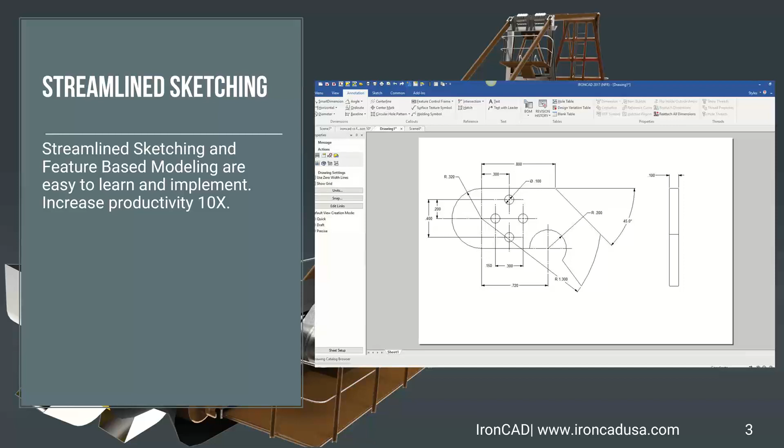So let's get right into the product. For those of you who have watched my webinars before, I'm going to start really simple and we'll get more and more complex. The easiest way for me to get into a sketch, of course, is I could go to the sketch toolbar, but I'm kind of lazy. I like to do things without hunting and pecking for things. So I like to use this extrude wizard, because that's the first thing I'm going to use to create a very, very simple freehand sketch for you all.

I'm just going to say okay, this is going to be a standalone solid. That's all I want. Just want that, and it immediately puts me into sketch mode, which allows me to show you something. I'm going to make my first part, and it's going to be a very simple little part. We're in part one right now. All I'm going to do is just introduce you to the tools.

So here are our sketching tools: polyline, 2-point line, rectangle, all sorts of different things, and we'll look at that. I'm just going to show you now, from the beginning. I'm going to start at 0,0 and just drag a line. Now you're seeing, as I'm sketching, this smart snap and information being given to me, whichever way I go, of course I get to see this information. And when I snap, that line is finished.

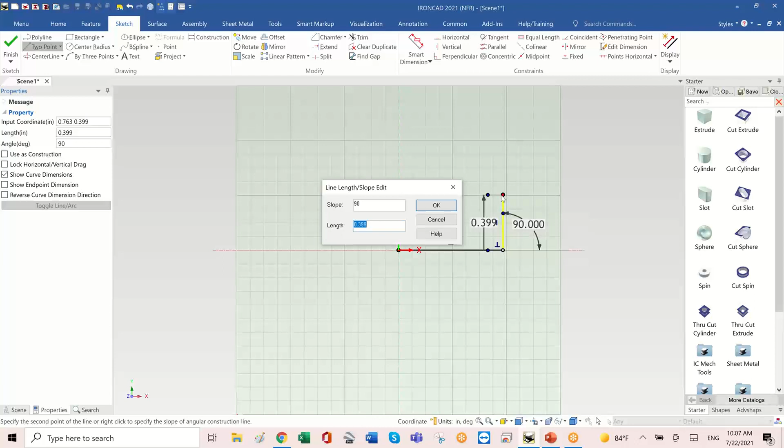If I'm still in this mode and I wanted to do something very simple, come off here and say okay, you know what, I want that to be exactly half an inch. I use the right mouse button instead of the left. So now I know it's exactly half. I'll do another little sketch to here, and I'll do another one. I'm just doing some really simple work, as you can see, and I'm not constraining anything. I'm just putting this all together.

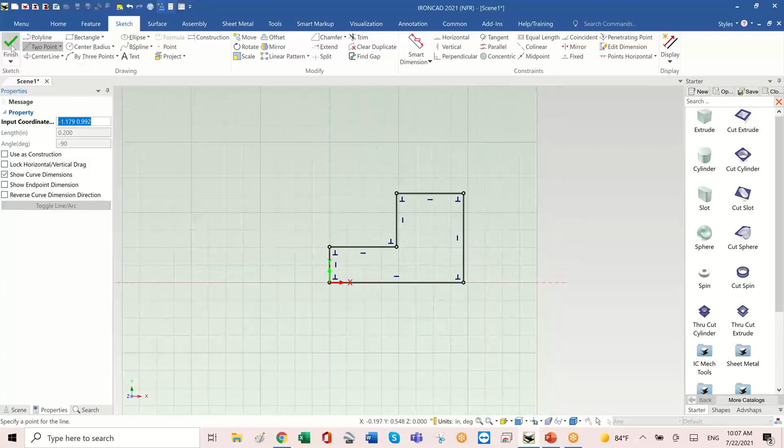As I'm working, that's my little sketch, and I'm not going to put any constraints in. As far as I'm concerned, I'm done with that, and I created my first simple shape. So that's just an example of concept sketching where I used a polyline to create something. But notice I didn't need to do any constraints whatsoever.

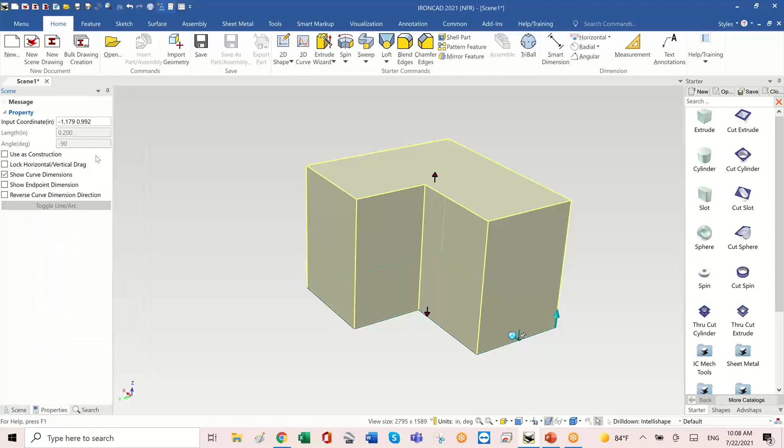I still have the ability to come in here and say, oh, I want to make a change to this. Even in the 3D world, I can come out and make a change. At any point, I can also go directly back into the sketch, the original sketch that was here, and if I wish to make changes, that's something I can do right now. I have the ability at any point to go back and make the changes, and that gets reflected in the 3D model.

So this is not the part we're going to be making, I'm just introducing you to the concept of sketching. The first part we're actually going to make comes directly from the website, and happens to be Joe Brouwer's website, and it's very informative. This is the part that we're going to be making. The reason I'm showing this to you all is because it gives us a great way. I want to introduce you to Tech-Net. These lessons, modeling techniques, are all online.

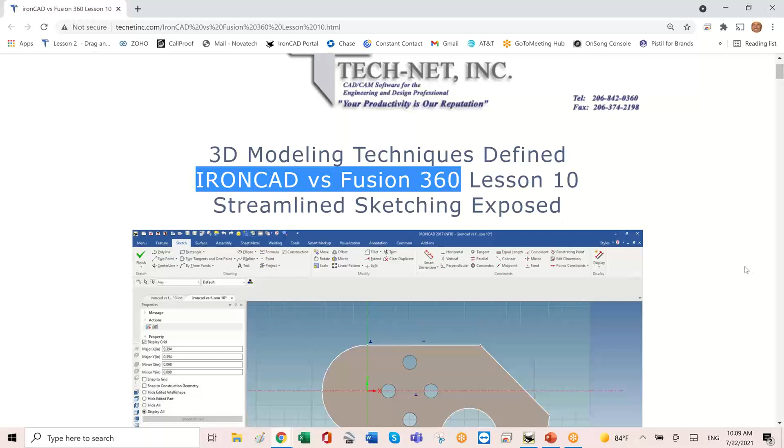What makes these kind of interesting is that there's a direct comparison with competitive products, so you can see how we work. I like to use what Joe's done because it gives me a great example. Joe comes from the drafting world, so everything he does is very topical and pretty easy to understand and see how he works.

So I'm going to be following that, and I'll show you how we make this sketch directly. I'm going to drop this onto a screen above me so it's not in your way. The very first thing, this drawing I have here, I want you all to be able to see because it helps us understand what you're looking at.

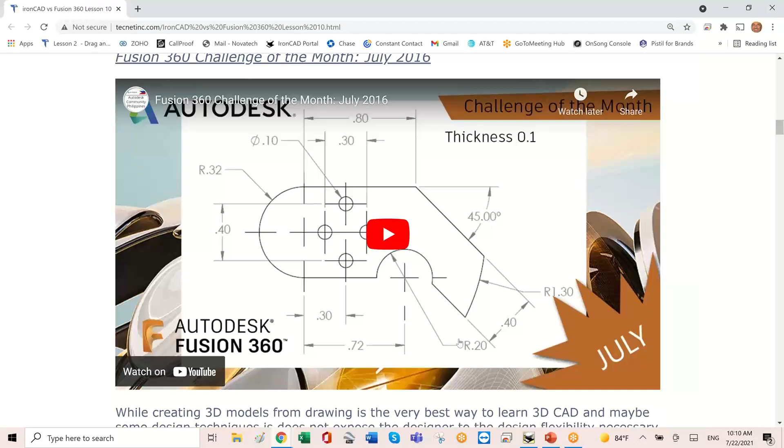The other thing that Joe does, which I think is fantastic, is you can see how this is done in another system. I know this particular one took about 10 or 11 minutes. For us, it's about a minute worth of work. So I'm just going to show you this part real quick, and then we'll go from there.

Let's start off with a simple extrude. With this extrude, I just want this one to be, let me take a look at my drawing, I don't think it's that thick. Hang on, Joe, I'm just looking here. It's 0.1 thick, so that's what I'm going to make, 0.1 inches. This part is in inches. I'm just going to finish that.

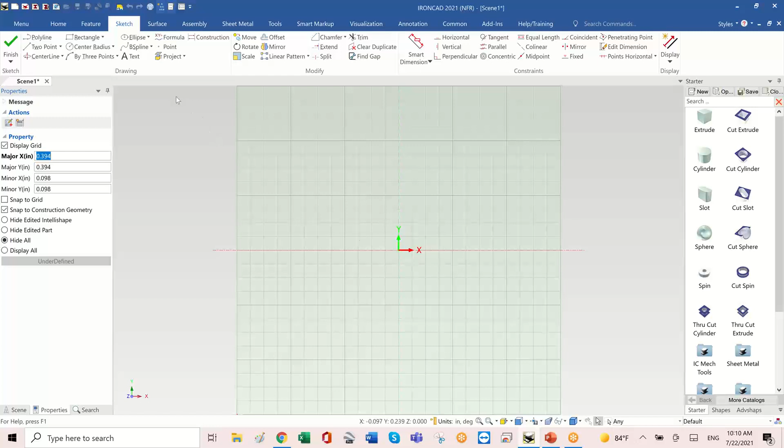So now we're directly in the sketch, and the first thing I know I need to do is create a 0.32 radius circle. I'm coming up here, center and radius, simply left click. And here's kind of a neat trick: if I come out and say 0.3 to get it approximately, and right click to place it, it automatically brings up this box so I can put in the correct value.

So now I know, and to keep everybody watching up to date, I'm going to be showing you this sketch. Now I need to create a line that comes directly off here. It's 0.8 and it's a horizontal line, 0.8 off that. So back into IronCAD, what do I do? I go and find a line that is tangent.

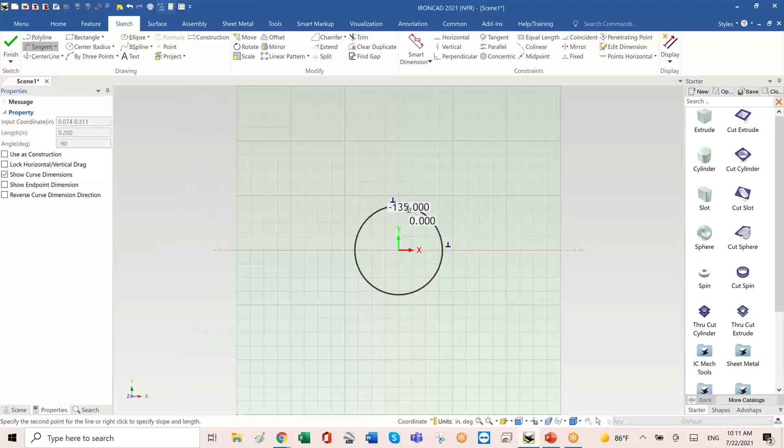This is kind of neat too. I just touch the circle, so it automatically connects. Notice how it's maintaining that tangency as I move around. Now I'm going to approximately get into position, and right click again. Why? I guessed the slope correctly with the smart snap. And the length of this, from the drawing, is 0.8.

So now let's look at that drawing below here. There's the 0.8. Let me show you how to fix that. 0.8, and then there's another sloped line coming off it. Let's take a look. You show me something, oh, 0.88. Well, that's not what I want.

Double click. Joe was telling me this morning, Bobby, the neat thing is when we make mistakes, that's where it shows how easy it is to actually fix it. So we've done that, which is kind of neat.

Now I'm going to come off the next one. So what's our next part? Right here, we're going to come down 45 degrees, as you can see. I don't really know the length of this because it's bounded by a circle that's 1.3. But let's just jump right in and do a 2-point line.

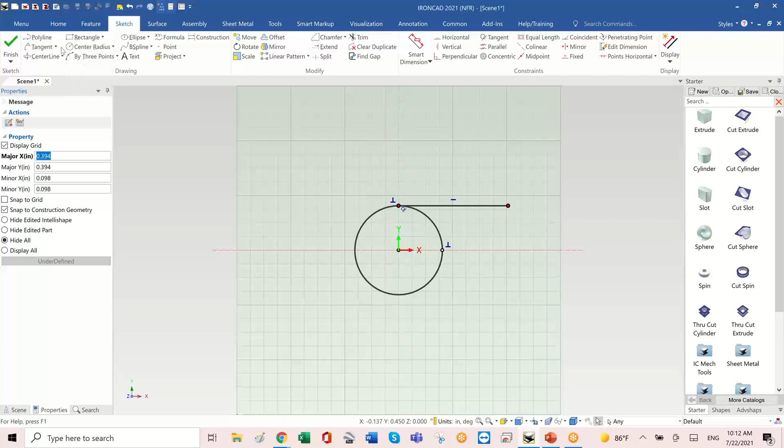Check this out. Grab it here with the right mouse button, and now I'm going to come off and release with the right mouse button again. What's the slope? It's exactly 45. I don't know how long it is, don't really care, but now I'm guaranteed to know that line is at 45.

And when I put the next center radius circle in, just to keep you up to date on the print here too: this big circle, 1.3, located at the center of the other one, that's what we use to trim this thing off. So pretty easy.

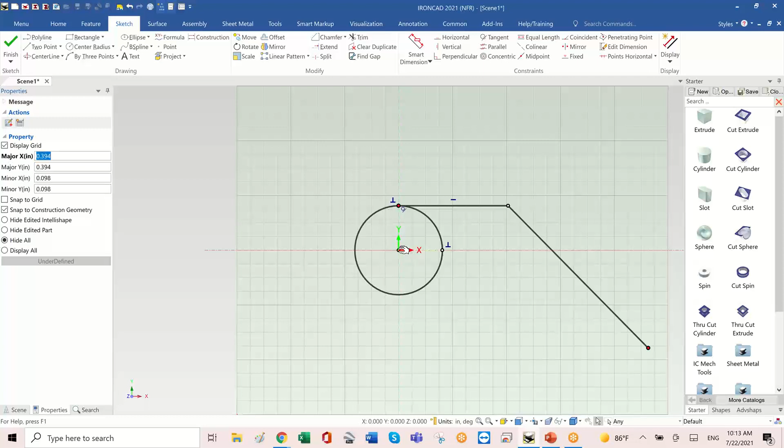Come in, find center radius, pick the center radius again. If we pick that selection, it helps. How big is it? Okay, 1.3, 1.3, enter. And so, well, that's pretty cool.

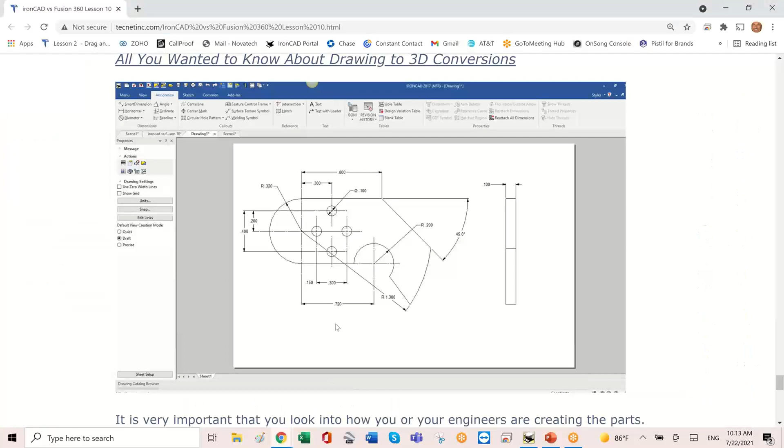And I also know, has anyone seen me do any constraining yet? Not once, and I don't intend to do any constraining on this. You know what? I can see the part. So what I'm going to do is take this part right now and move it onto a different screen so I don't need to keep jumping back and forth.

All right, here's the part. I know I've got a parallel line to that, which is, I believe, 0.8 over here. So give me a 0.8 line.

Did I get that? Where'd you go, little guy? Offset this line - there it is. Now I can trim exactly what I need to.

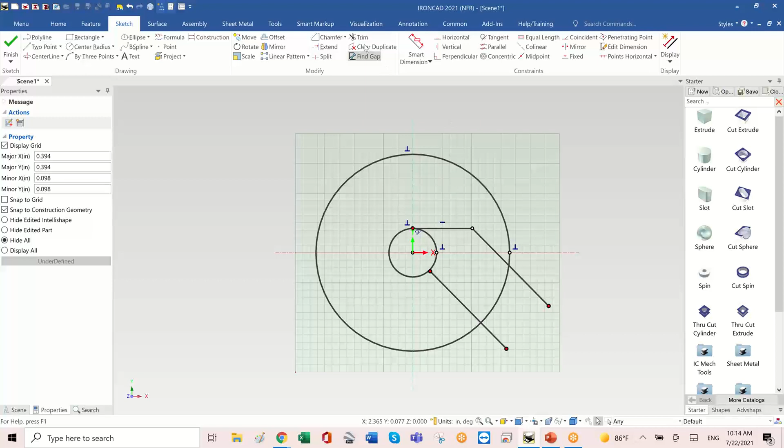Oh, by the way, I don't want that. It gave me a constraint. I just said no, I'm not going to work with constraints today, but we can if we want. Trim this away - I don't need this part, and I don't need this.

Look what's happening, I'm coming through. It's automatically giving me, as I start to build this part - it's kind of neat, it's building it as we go along. So, not quite done yet.

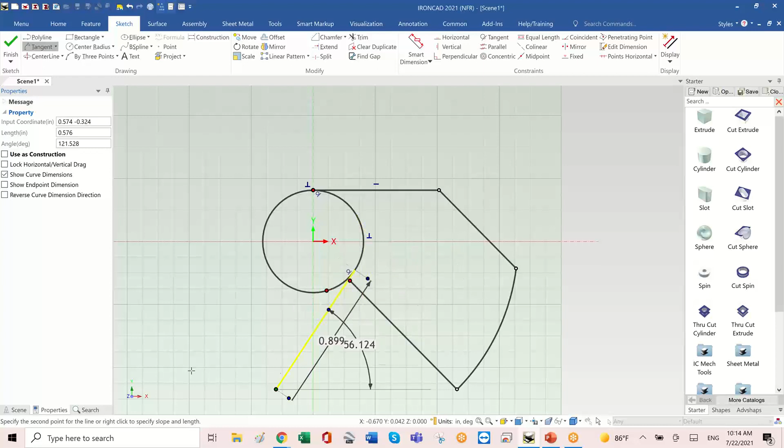Give me another - not a 2-point, a tangent line that comes directly off here, and it's 0.72 long. So again, touch the circle - hey, where'd you go? Wrong side. Touch the circle again here, and I want this line to go exactly how far?

Well, I know that it's got to be 0.72. So, 0.72 - all right, that's how long that line is. And why did I do that? Because that's the location of a 0.2 inch circle.

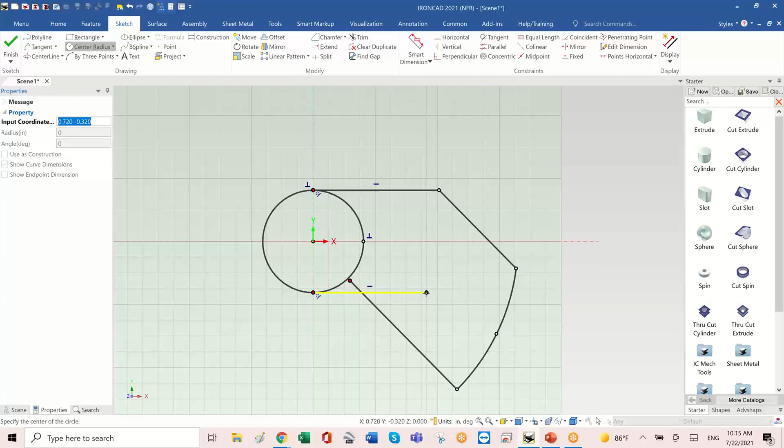Oh, 0.4 - thank you, appreciate that, Joe. This is 0.2. Thank you, and this distance - hang on, you are...

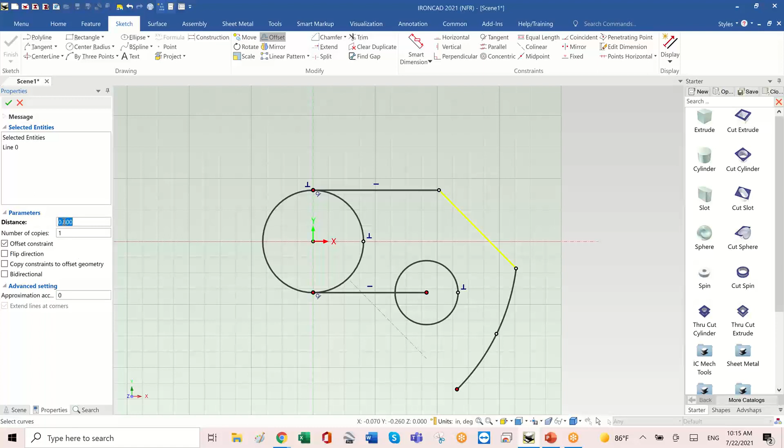I don't actually like that. By the way, I didn't do that correctly. What do I care? It's half of that. I'm going to, as I go ahead, that's where it should be.

And by the way, how easy is it to extend or work with this geometry? Watch this - I just grab this line and extend it there. I'm just picking and placing.

For those of you watching this, I've actually finished what I need to do now. So I just trim away the geometry that's not necessary anymore. Don't need this, I don't need this, don't need that. I don't care - don't need this one, and I don't need that either. And there, looks like I got a pretty good shape.

At this moment in time, I've done what I need to, and I'm going to say, go ahead and finish this. And there is the first part that I created. So there, I don't go any further. This is exactly the part I was looking for - this is what I needed to do, 0.1 inch.

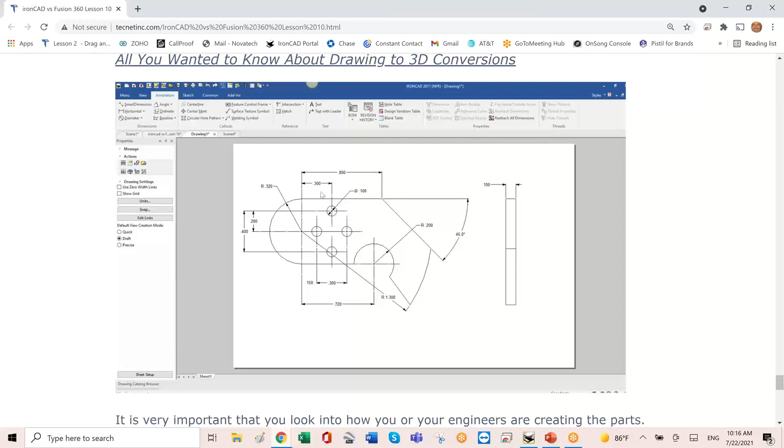Oh, just to show everybody - of course, I may have forgotten, these holes need to be put in. So let's go ahead and put in the holes so we can see that, and here's the easiest way to do that.

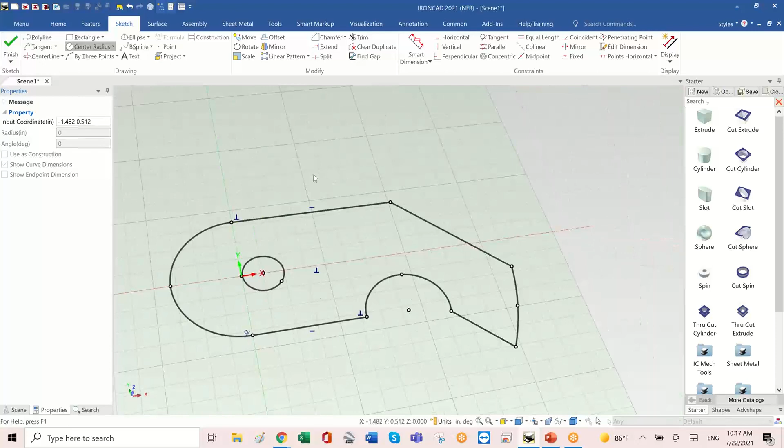Now, why would I think about holes when I'm doing a sketch? Of course, if I want to be goofy about this, I could go back and edit this cross section and do something silly like this - forgive me, Joe, I'm just going to do it and then delete it later. I could put these holes in and have them appear in the sketch if I want, but that doesn't make sense to me because that's an enormous amount of work, and it's work that doesn't make sense to me.

I make this shape, and once I've finished with the shape, now I just use the tools available to me, and I'm going to say, okay, drop a hole in here. How big should it be? It's 0.1 - good, but it's not actually located in the right spot.

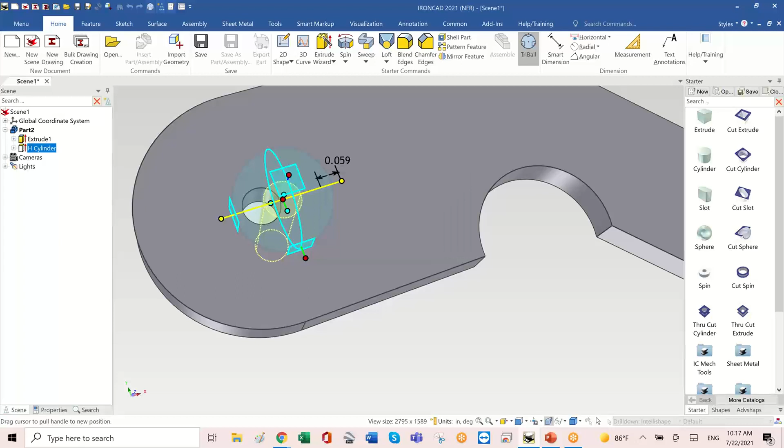I'm looking at my drawing, and that's supposed to be over about 0.15. So I'm just going to move it where I need to move it, 0.15 over. Good, that's where it's supposed to be - that's the center of that one.

And by the way, there's more - there's 4 of these. So I'm just going to use the triball, and we have training on the triball. Using the right mouse button, I'm going to push this over, and I'm just pushing it over, and I want to link it over there, and I want to move it. I'm looking at the drawing, by the way - move it over 0.3.

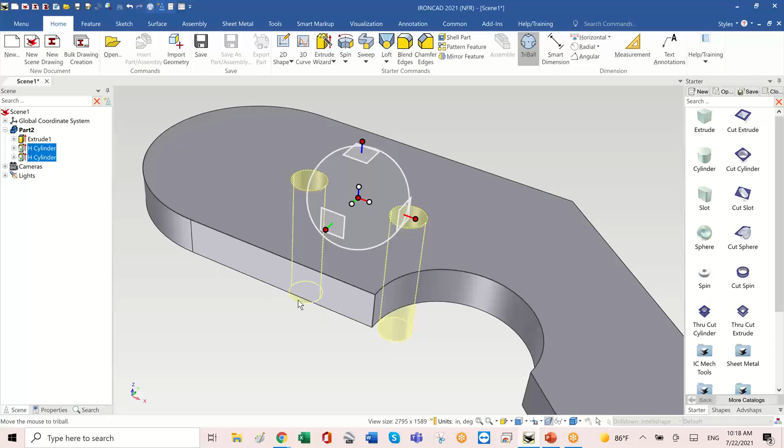Perfect, love what I'm looking at. Check out this trick, it's so special. Grab both of these holes, bring up this wonderful triball which helps me manipulate geometry. Unlock the triball and say I want this located at the middle of this point and this point. Lock it, grab the second axis and say take both of these and create a link exactly 90 degrees off them. Thank you. Now without any really difficult thought process, I've got these in position and done.

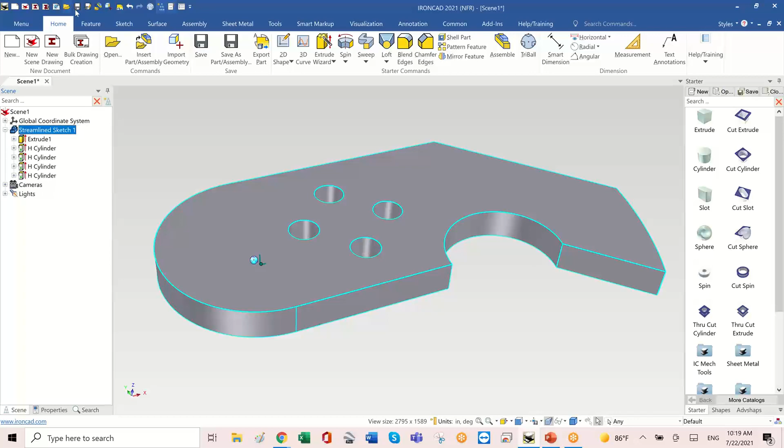At this point all I need to do is say, okay, what do we want to call this? I'm going to call this streamlined sketch 1. That's my first part. Save this file, yep, save it right there.

And why not give me a quick drawing so we can look at the work we've done. This is kind of a neat thing. I want to just pop this down like that. Perfect, that's the view I want as the front view. And I want all 4 of these. Good, take it together, and there we go.

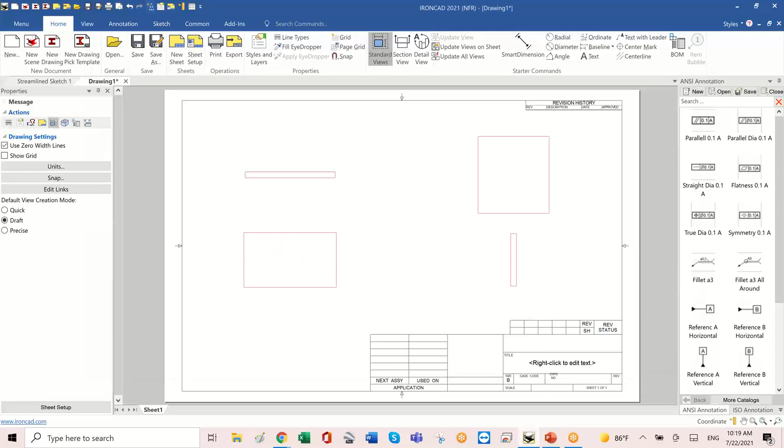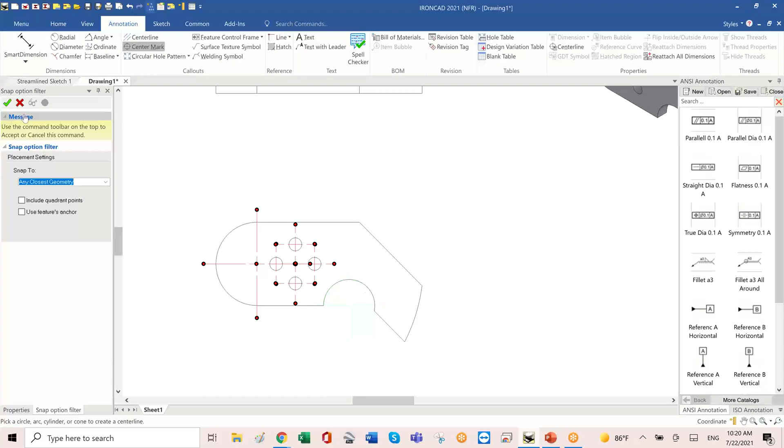Looking at this, if I want this shaded view, and any of these things, if I wish to do things like, oh dear, I notice I forgot, I didn't put the center marks. So go ahead, put a center mark there and get all my center marks, and of course I could pick them in a box. Would I do the outside one here too, Joe? Probably not, but there you go. There are all the holes marked on the drawing, as you can see.

Remember this, anything that happens here, any dimensions we need to do, dimensioning is kind of boring but let's do some quick dimensioning. There's the correct radii I wanted to make sure this line was, yes, it's 0.8. What's the distance from this point, this location, to here? What are all the different distances, you get my drift, and we can go through all the different examples of how this would work.

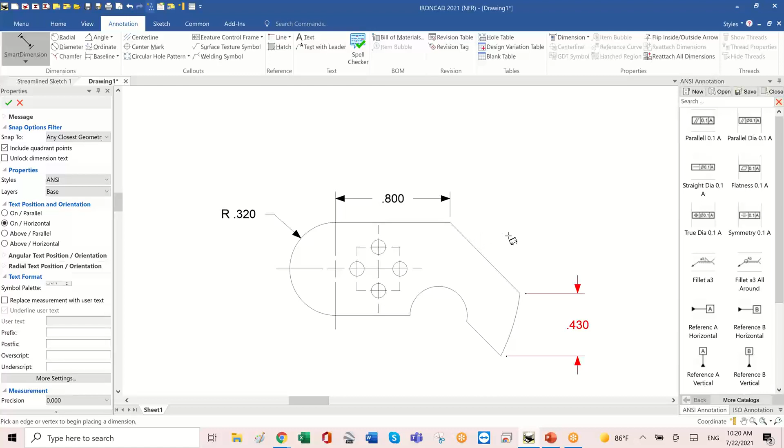And what happens if I don't like something I see here? I can go back to the scene instantly. Now do I have to edit the part, go in there and make a change to the part? Or I could do something like this: pick these up and say, you know what, I'm going to make a simple change where I pick up this whole thing and move them over because I don't like where they were. Of course that's done. What about our original shape?

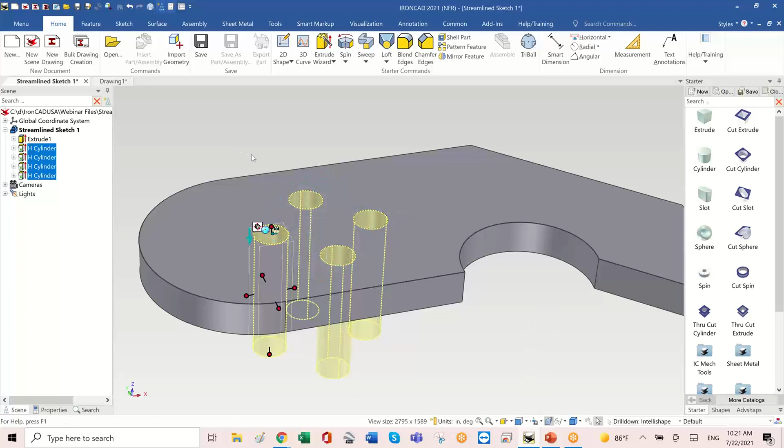Well, what if I needed this to be slightly pulled out? Yeah, 0.68, good. Without even going into the original sketch, I've made changes that will automatically be reflected, as you can see here, in the drawing. So everything I've worked on is being captured therein. So you can see the idea, sketching quick and really, really easy.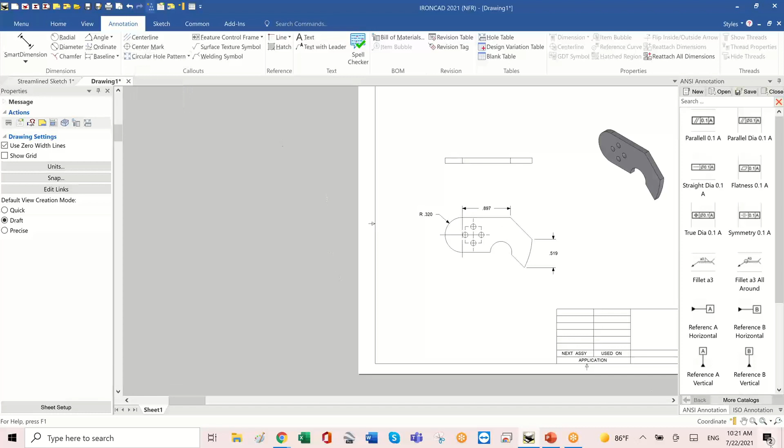What you haven't seen me do is the really frightening thing I find in a lot of different systems, which requires me to go in and work with a constraint system. Most of the systems I've worked with, I'd have to figure out things like, I've got to make sure this is parallel to this, okay got that one done, and go through the whole process. For me it's much easier to do this concept, streamlined sketching, get it done quickly, and then I can add parameters later if I need to.

So got the first one done. Let's look at another example of perhaps a more difficult sketch because it has a little more flowing shapes.

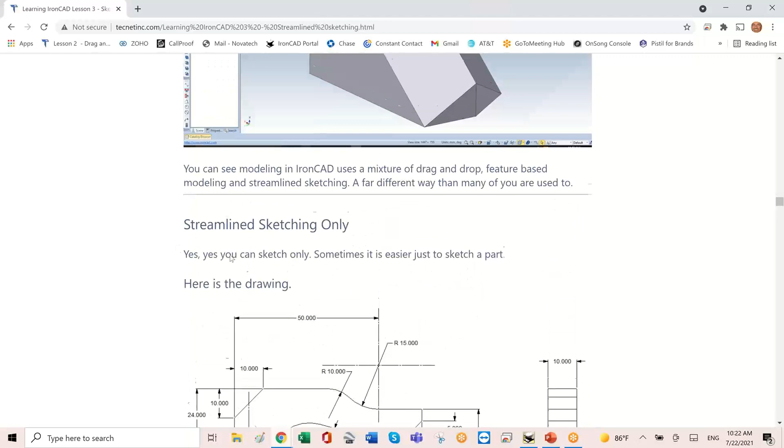Another example, but I notice instantly this is the drawing we want to work on. I notice this one is in millimeters. No big deal, pop back into IronCAD. I want a new scene. Check this out, give me this new scene here, and here are all the different choices. I can grab all the imperial or metric, let's go and look at metric.

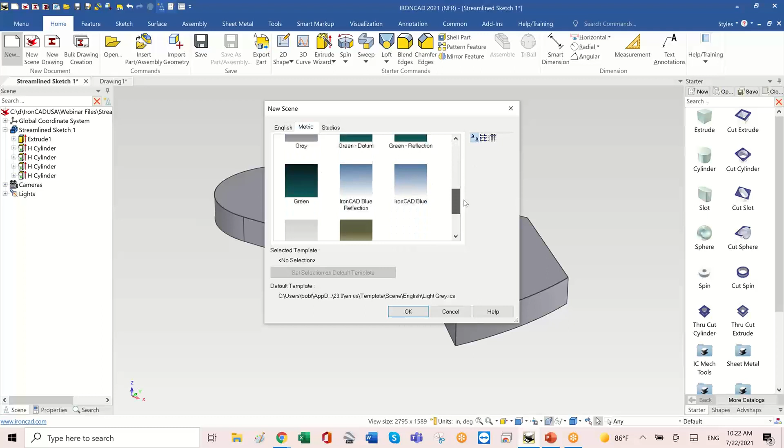What might we want to do? Go ahead, grab the IronCAD blue just so we get a different background. And now we want to sketch. Let's do the same thing we did before: extrude. How thick is this one? I don't really know, I don't really care, I'll add the thickness later.

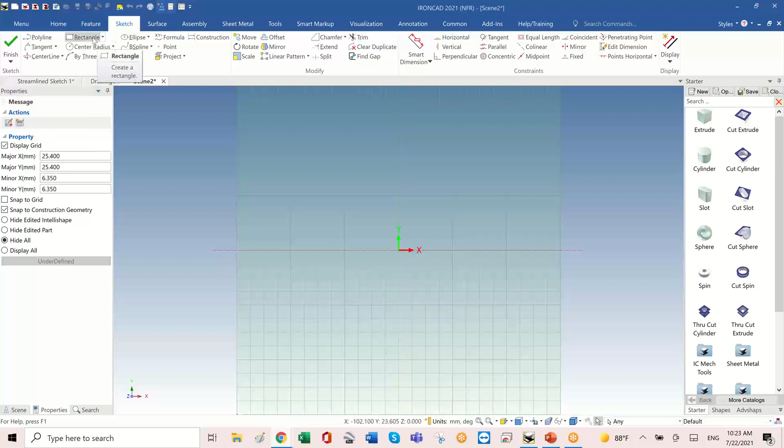Now we want to start sketching a completely different looking part, here it is. And if you'll notice, it's made up of a rectangle, 24 by 65. So that lets me use some of the automation tools that are here. Instead of just using lines, give me a rectangle, go ahead and sketch. Right mouse button to finish the command, because that lets me enter 65 by 24.

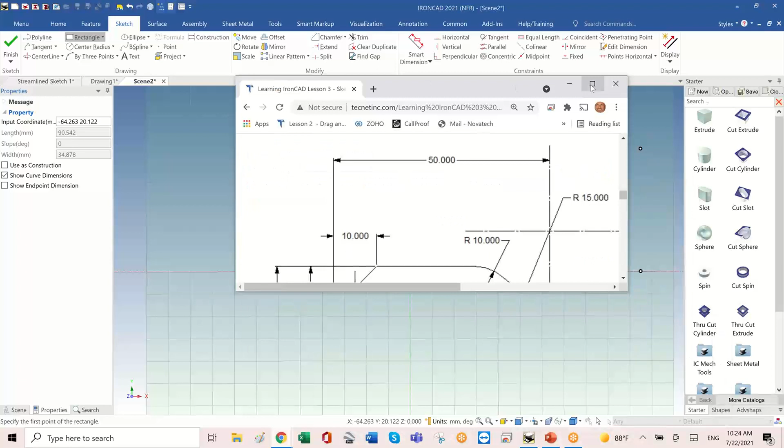So there's my first shape, the first one done, and I noticed it's got a 10 by 10 chamfer. That's kind of neat to show you, because what I like about the way this sketching works is it didn't give me an angle, it gave me two lengths. The last one gave me a length and an angle. Well, this time it's just 10 by 10. So how do we handle 10 by 10?

Let's go into our chamfering command. What are the different choices in there? Well, I could do distance, distance, or distance, angle. Oh, I got 10 by 10 - that's what it's actually told me on each side. So the first line is here and here. There's my 10 by 10 chamfer.

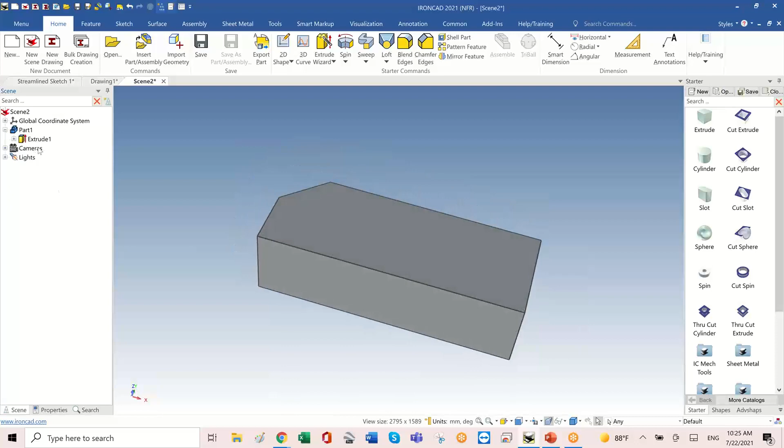Now, you guys want to see a really neat trick? I'm right in the middle of sketching, I haven't finished it yet, but I don't care. I'm going to go in and say I am finished - I want to instantly see how my sketch is doing as I'm going along. Okay, great, doing exactly what I want, back into the sketch. As I'm working, I can see this.

Now, boy, I've got some really interesting things now as I work with this. Let's take a look, let me bring my drawing back again - sorry to hop back and forth, I just want you all to see it. So now let's work on the bottom.

Let's start putting this in. So I've got a 5 and a 10, this 10 millimeter radius. Well, let me go check something - so offset, how much, 10 millimeter. On which side? I don't want to constrain. From this line, oh, it shows me there's a little helper line on here. No, I don't want it on that side, flip the direction and put it there. Beautiful, so I have a helper line over here that I'm working with, and it's a 10 millimeter radius.

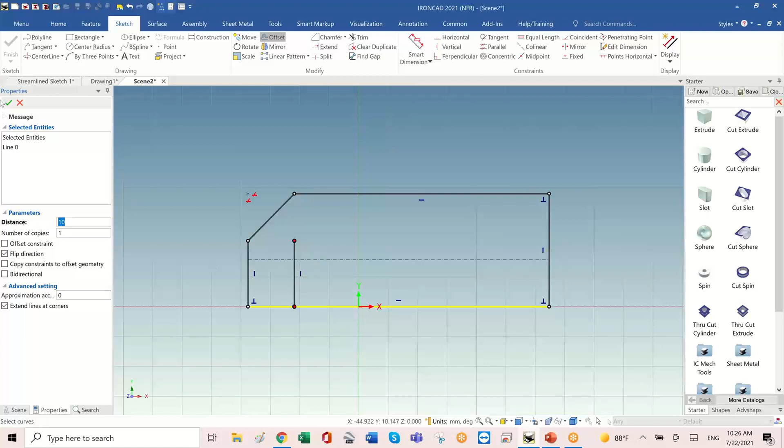I'm going to do one more line just to show you all how that works - kind of fun. Another offset line from where? From the bottom, and I said 10. Good, and notice the helper line there shows me it's in the right. Now, if I want to, I could just trim this away and trim that away - that's the center of that radius.

So how do we do it? Give me the center here. And I don't actually have to - I can just come down till it touches. Perfect. Hey, didn't need to, I'm just using those lines as construction to help me put this into position.

And at this stage, let me look at the next part. This is going to come up. Oh, I need to start from here because I can see it's got some geometry that needs to blend in here. So let me start from this other side and make sure I can start working my way down along here. So 17, and then I'm going to have another chamfer.

All right, I'll put this above the screen so I can just continue to work. So what am I doing? Do I need that? I don't need you, you go away - that was just the center of that. Now I need a 17 line, so offset from the lower. And oh, I see you're there - thank you, you're already on the right side, which is telling me that's great and excellent.

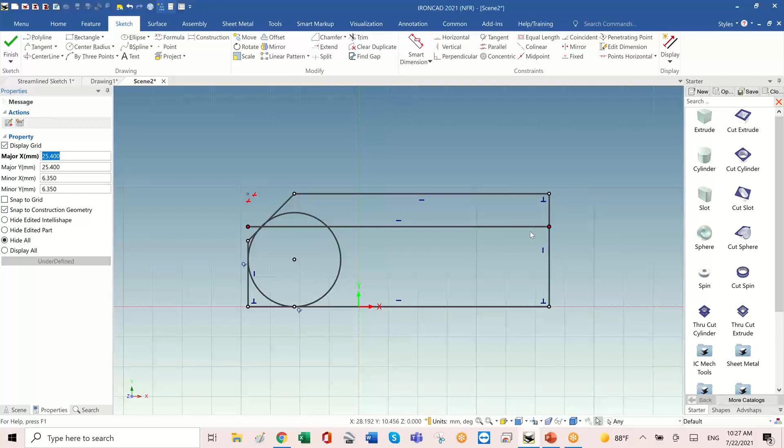So that's where this top is going to start, right there, and I'm looking forward to that. Yep, that's exactly what I want. And then there's an 8. So give me one more of those, another offset line from the bottom - and I'm sorry that you're seeing this. That's going to be 8 millimeters.

And that's the one I want there. And of course, that's the trim that I'm going to need - I don't need, and I also need a chamfer right there. So let's just see if it can do that for me. The chamfer is 5 by 5 on the drawing, 5 millimeters, 5 millimeters.

And once I've done it, this and this, there, that's the - see, because I'm going to come from the top here and come along into this line. So it's given me that, and as you can see, I'm drawing now, coming around here and matching this bottom. All right, so that'll be cool.

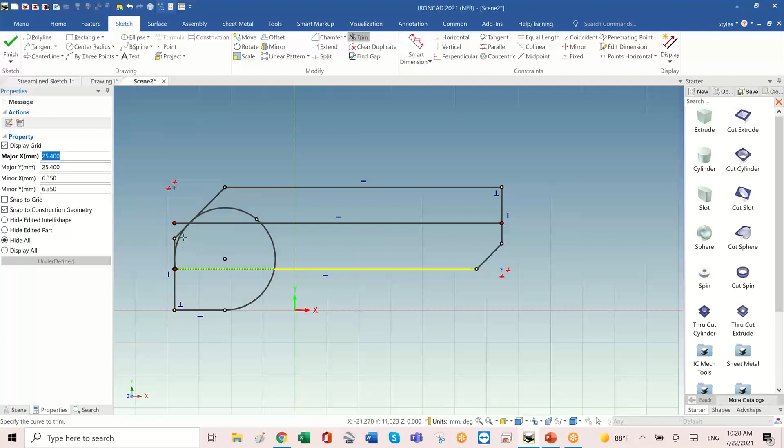By the way, I don't need you - trim one more, you're kind of in my way. Very nice, excellent, this comes off, down, good. I don't need that, I'm just getting rid of this extra geometry so it doesn't confuse me.

All right, and I'm going to have an offset line coming off the front. By the way, I'm just taking this directly from the print. And let me just make sure - there it is.

That line automatically shows me where there's going to be an angle line. Notice this time I just dragged it there into position, because that's where the next line comes up. It's just a 2-point line that starts here. And where does it go?

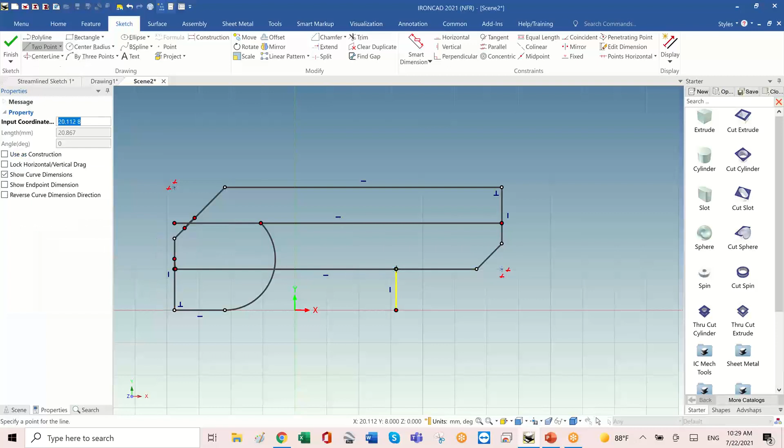All I know is that it's 15 degrees. I don't really know the length or anything like that, so I'm just going to take it out there. What is it? Well, it's 180 degrees minus 15, and since I don't know the length, I'll let it calculate automatically. It's not hard for me to just enter what's here on the drawing.

And the last thing I need to do, okay, we've got this. Do I need you at all? No. Oh, there we go. And now I just need to blend these two lines, so it looks like two tangents and a point here.

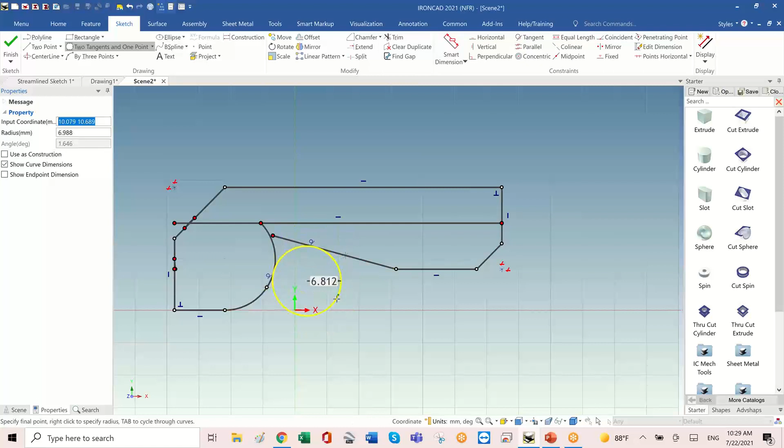Look at all these choices for radii. Two tangents - it's going to be tangent here, and it's going to be tangent here. And what's the point? I don't know, I just know that it's got a radius of 14.

I say great, and check out what's happened now. So with the trimming, not once have I had to think about a constraint. Not once have I actually had to use constraints at all.

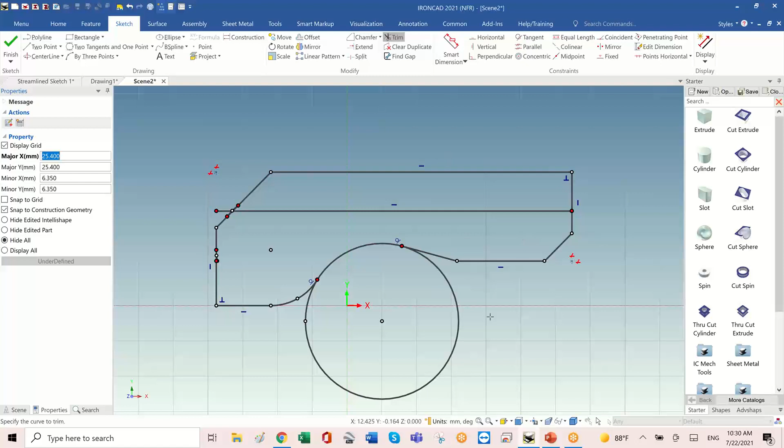And you know, if I want to be expeditious with this - excellent. I need to now do one more big circle, and we're almost done, by the way. If you take a look at what I'm working on immediately at this point, I don't need you out here either.

So you can see we're finished, almost done. We need to do the top. I want to bring this in so you can all see it. So you can see that we've let the system calculate all the underneath. Now here's the top - there's a 15 millimeter radius that's 50 mil off the front of the part.

No big deal, not once have I had to put in a constraint. Give me an offset from here. And what is that offset? What did I say it was? 50 mil off the front face. And drag it up just like that. I don't even need to know.

Keep that straight, that was 50. And so, what is that again? Oh, I know how it is up there. Sorry, I need to use my brain a little bit. So from this line, it's going to be 15 mil up.

Oop, wrong way, undo that. Sorry, do it again from the top here. See how it shows me down here? I should have paid attention and flipped it the other way and said that's where I want it. Okay, so there's the center of this circle.

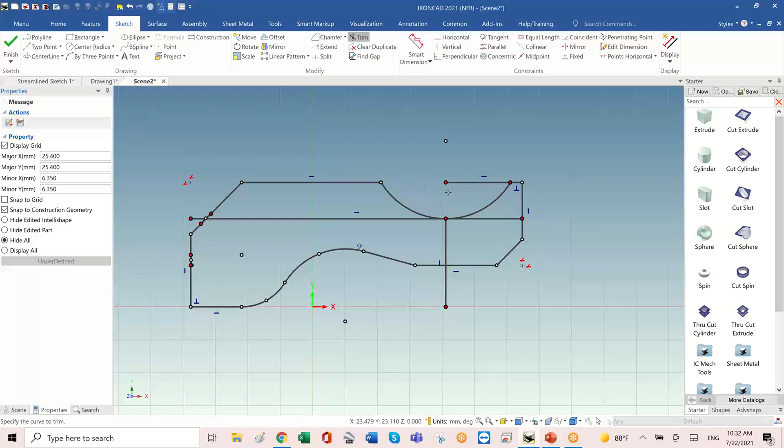Don't need any of these different things, and you get rid of them. Don't need this, don't need that, don't need this - see what I'm doing? I'm just cleaning this up now. So I end up with the actual shape that I need, which is this shape, just like that, and there's the and all these extra parts.

Now, you'll notice that this hasn't been blended yet, and why not? Well, I don't really need to blend. Oops, edit this - let me just make sure. Hey.

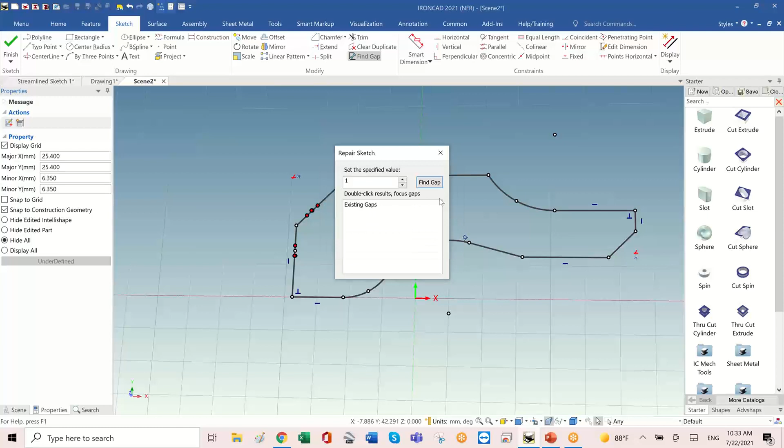This is where I can use Find Gap. Where? Oh, there are no gaps. So, there are lines there? Where? Do I have extra lines?

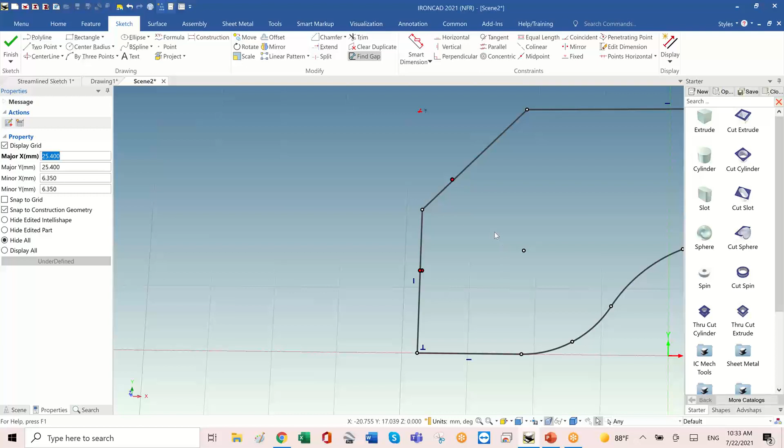Ah, you're right, I put in a bunch of extra lines. Is that what's going on, Joe? Yeah. No.

Oh yeah, just window those and they'll disappear. You didn't trim, missed a trim. They're done now. You can tell by the red line, the red dots aren't there. The red dots mean it's not a good sketch, like any other one. If you don't do a correct sketch, it'll show you the extraneous.

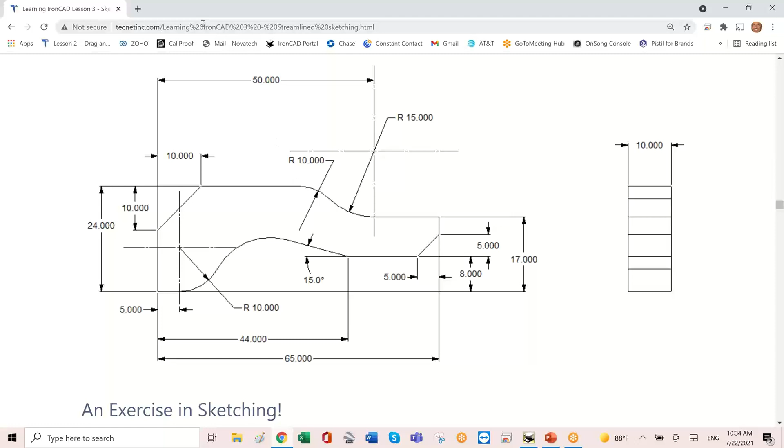Now, what was kind of neat about what we did here, Joe, and I appreciate this example because it's not entirely simple - I left out this 10 millimeter fillet here, and the reason I deliberately left it out was because I have the ability now to go in and just say, well, I don't care, just blend this, but not the whole face. Blend just this little edge right there and make it 10 mil. So I can go in after the fact and add that kind of thing.

And we could do other things here too that are kind of really exciting. What if this were a plastic part? Or what if I wanted to make changes without going into the sketch? I don't know if you all know this, but for example, I can pick directly on this face and say, well, wait a second, what is that radius? And it'll come back and say, Bobby, that's a 14.

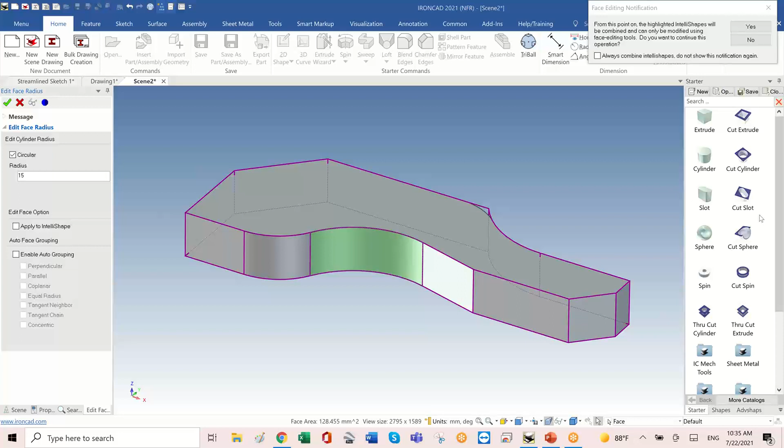Oh no, I want it to be 15. And of course, now I've gone in and made that change without actually touching the sketch, and it's made the change for me. No, don't feel like doing that, I'll leave it the way it was. And I could go in and change it that way.

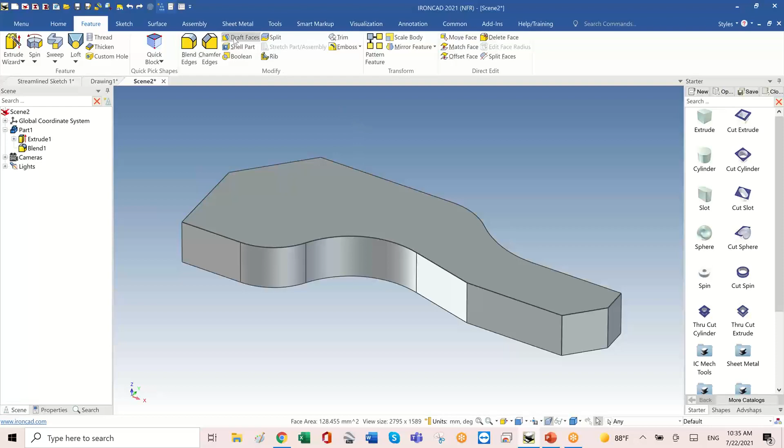But let's do one more thing before we're finished with this. Let's come in and say, well, we want this to be a plastic part. So we might as well come in here and say, what if we draft this, and put draft - it's kind of neat - at 5 degrees. What about if I draft this? Oh cool, now as you can see, I'm picking these faces and they're all drafting out 5 degrees.

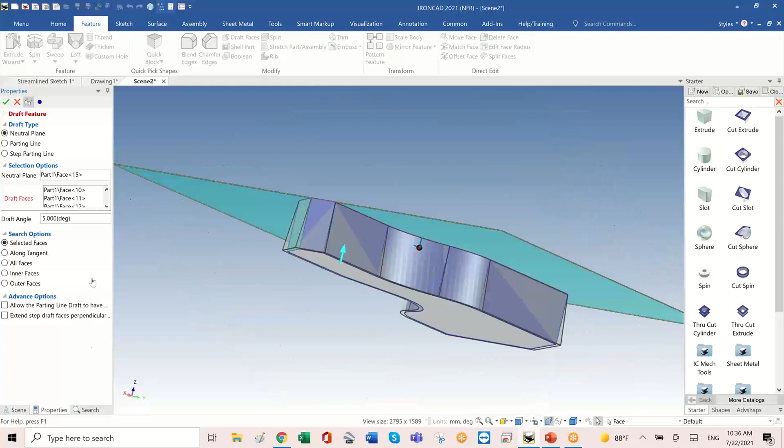And of course, I'm using 5 degrees to show you it's a lot more as I walk my way around this. I could have picked that in a box, and I say great, and now it's drafted everything out 5 degrees.

What about this idea? What if I come in and say, shell the part, because I want it to be plastic, open up the bottom face, and give me a 0.5 millimeter wall thickness. And now I've got a shelled part.

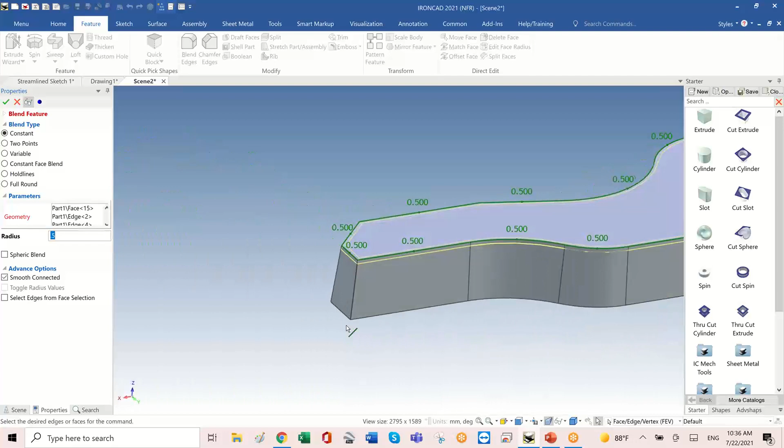And the last thing I would do is say, well, what if, because it's plastic, this has a 0.5 millimeter fillet on it? And what if I also wanted that fillet to be on each one of these sharp edges, because it's a plastic part? So I want to make sure wherever I have a sharp edge, I'm now changing that. And again, I know this is on sketching, but I want to show you some of the power of IronCAD as well. So there you go.

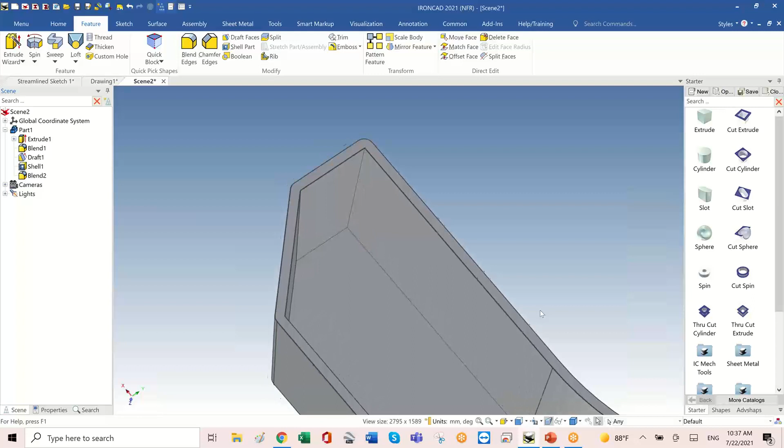I've added all those rounded corners, but I have a bit of a problem. Look at the inside, look what's happened here. Because I did the shelling before the blend, the inside isn't following the same thickness. So all I do is come over here to the history, pick up the shelling, and put it after the blend.

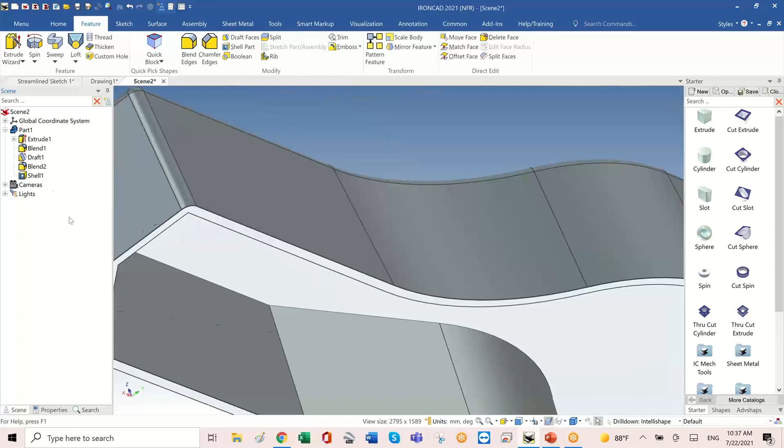Watch this. Oh, I see what you're saying. Yeah, of course, my silly mistake. Well, the blend was only - I'll go back here, edit that, and make it a little bit bigger. You're right. Do that.

And now, by the way, it looked like this before. So as you can see, as I zoom in on this area, you can see it didn't capture that because the shelling happened before the blending. Well, we just pick it up and say, no, shell afterwards, and now it's fixed. And there's our little plastic part that we could take apart, do core cavity, and all the wonderful things.

Let's actually just name this Streamline Sketch Plastic part, okay? And once we've done that, quick save of the file. Sure, takes my name. Good. Part saved.

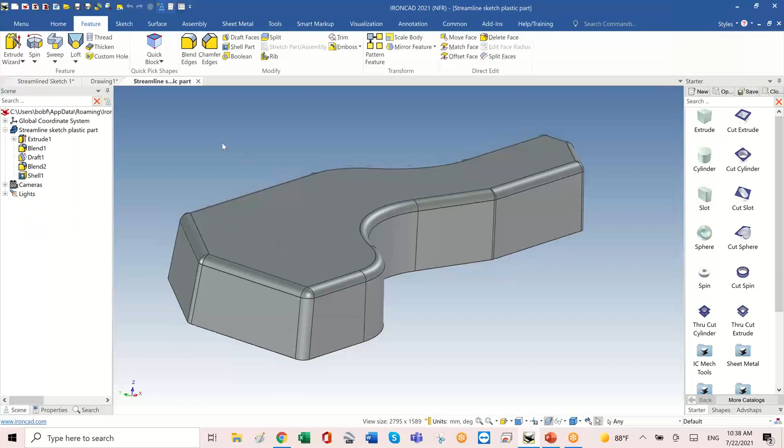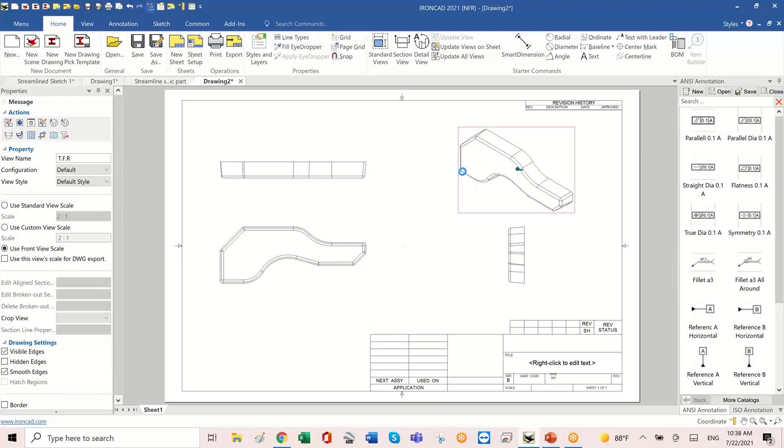And we'd like to do a very quick drawing of this. All right, here we go. I want to look at this from the top here, right front, bang, and put it out on a drawing. And there you see, really without a lot of bother, we've got a streamlined sketch part all the way through into where we're putting it on a drawing, and we could separate and do whatever we need to do.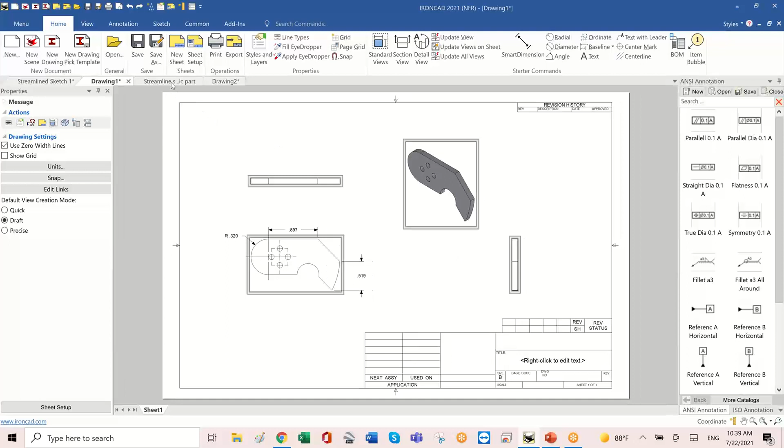So far, just so we understand, we started out with a very simple part, created that, and then created a drawing of that. Then we created a more... I made some changes, of course, I moved these holes over.

And then a more complex part where we did some sketching, did some drafting and changed it, and then made a drawing of it.

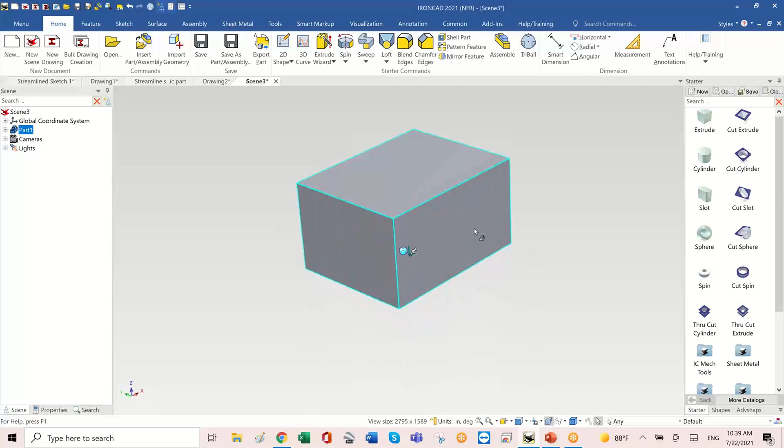One last thing I want to show y'all, which is really neat about IronCAD and sketching. We know we can drag and drop parts, but did you know I can come in here and drag this out? This is a simple extruded prismatic shape.

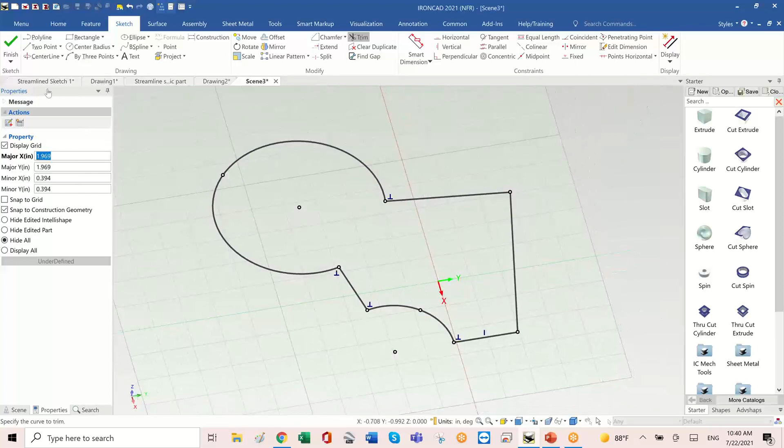What you may not know is that this simple prismatic shape is actually driven from a cross section. At any time I can go into the product and change the underlying cross section, or even change this shape entirely. Maybe I want two of these, so I'll add another center radius over here, and maybe this one bobs out a little. This is a neat idea showing that we're changing the structure entirely of this part, and that's what we started with, and that's what we end with.

It's important to know that this started life as an IntelliShape. IntelliShapes can be grown in the way that they have handles, so I'm actually sizing this accordingly.

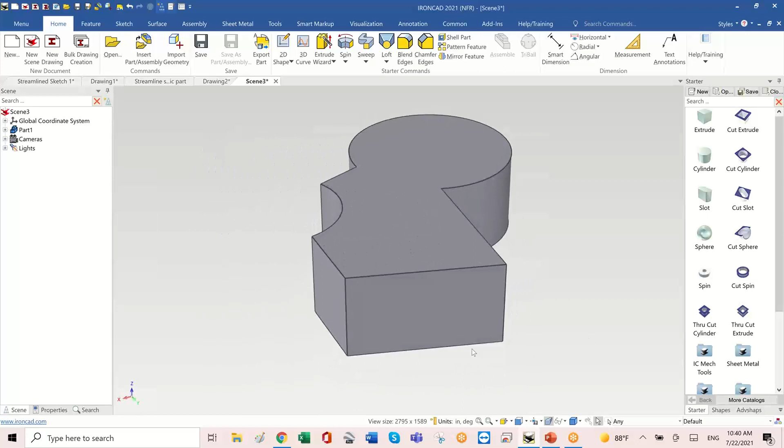There's one last thing I want to show you, which is quite fascinating. What if I now come in and say let's drive a hole? This one's a bit big, let's make it 0.75, and I want this hole, no matter what, to go all the way through the part. So no matter what I do, it will always go through this part.

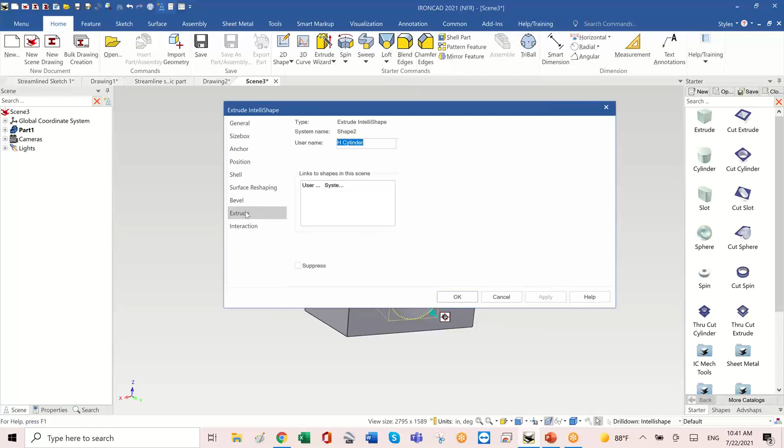Just for fun, I want to show you something interesting about our IntelliShapes. I'm going to say everywhere that you intersect, I want to have, I don't know, 0.5. Can it do that? Oh, that's too big. Let's take that, what I'm looking at, the bevel, the blend, make it point. Good, that's better. So I put in a tiny little blend there so you can see what I'm doing. I'm switching between, I forgot that I was in inches. Let me do that bevel one more time so I can get it correctly. 50 thou, I forgot that I was in inches.

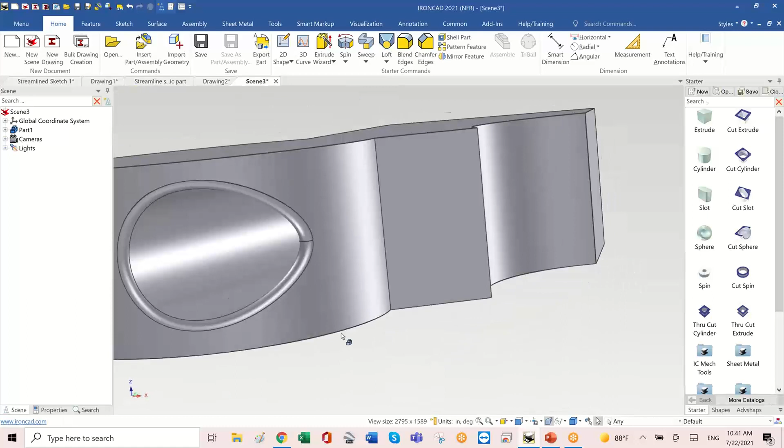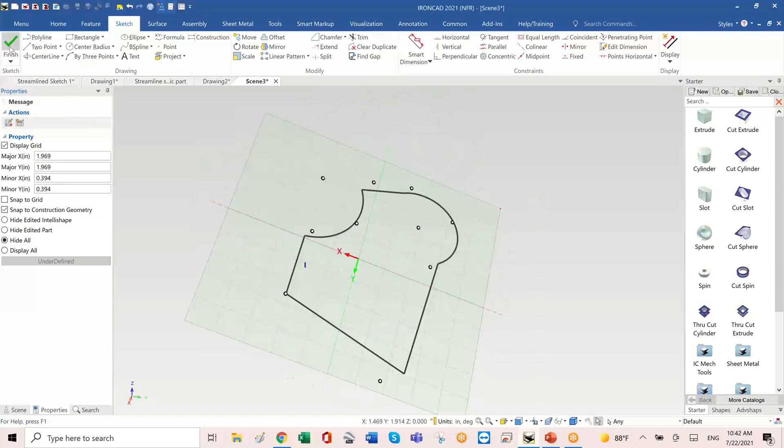What you'll see is that no matter where I move this, or how this shape changes now, if I go back into the original shape and edit the original cross section, there's the cross section I have. If I come back and, oh, I want this one, no, make that much smaller, like that. Okay, I like that, that's a lot better. Now jump up out of it. Look what happens, everything will update automatically. Any of these changes that I make, there's some real power here.

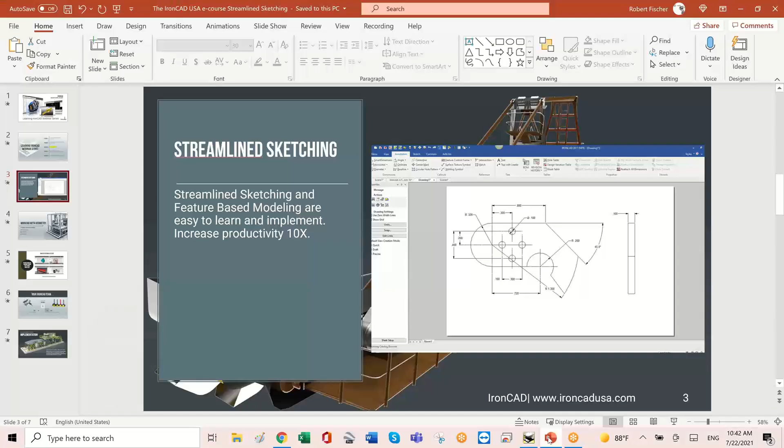As I'm moving this through, it will cut through in different places. So I just wanted to make sure everyone understood that as we are working with parts in this product, we always have the ability to go in and sketch.

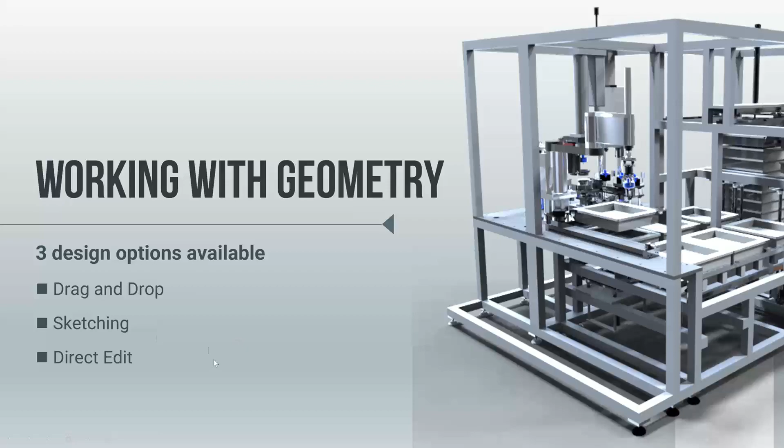So that's what I wanted to show you today. Geometry in this product has drag and drop, which we've shown in a previous session, sketching, and direct edit. We have a number of these webinars available to you, covering feature modeling, assembly, drag and drop modeling, and how to do cut and paste modeling. These are the webinars that are available.

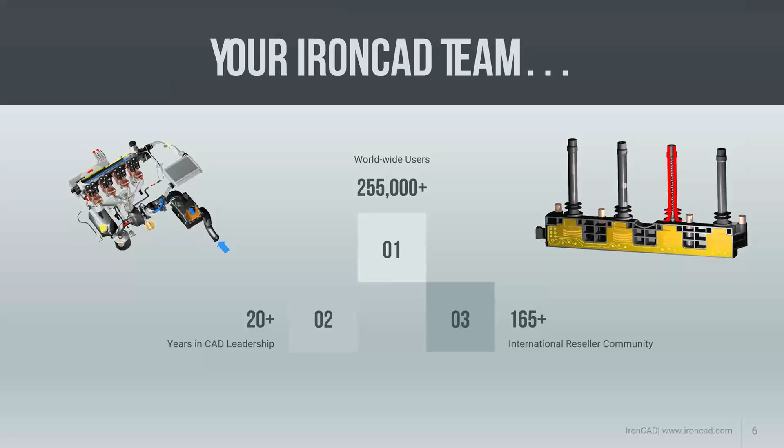Let me just take a look at this. Thank you, Joe, I can see that. If there's any...